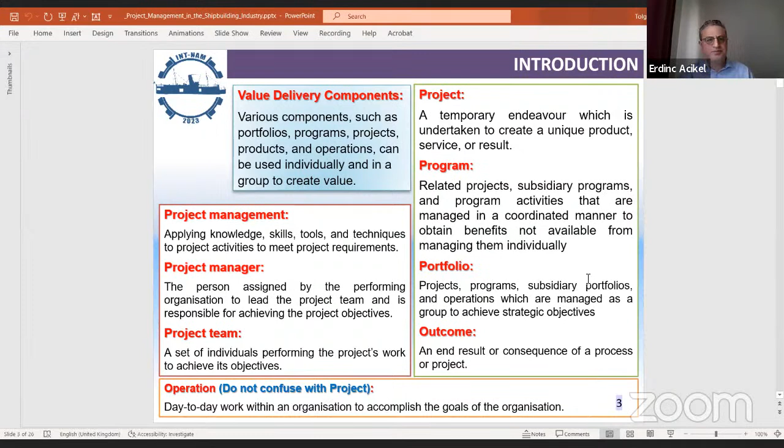So, project management in the shipbuilding industry. First of all, I would like to start with what a project is. A project, in common terms, is a temporary endeavor undertaken to create a unique product, service, or result. In our case, it is shipbuilding, so anything floating on water. When projects come together, they form programs. And when programs come together, they form a portfolio. As the end result, we receive value, which is the outcome. So we have a business benefit. Companies either conduct projects or day-to-day operations to reach their business value. You can take a screenshot; this is very general knowledge. You can look at it later.

As I said, a project is a temporary endeavor to create a unique product, service, condition, or result. We have a project environment, and our environment is either predictive, adaptive, or hybrid. Our project is predictive when we know what the end product is, like in our case, the vessels. Our project is adaptive when we are not sure where we are going. Mostly the software industry works adaptively. They use small increments, get feedback from the customer, and go on. Even though we think shipbuilding is predictive, actually it's quite hybrid, because we don't really use the common predictive project frameworks, and we tailor some components of the frameworks according to our needs. So mostly we are working in a hybrid world in shipbuilding.

Yeah, both from the product point of view and from the approach point of view. Indeed, the shipbuilding sector has more in common with hybrid construction, because as I mentioned in the very beginning, there are things which should be tailored according to the type of project you are building. It will be a completely different approach if you're talking about, for example, mega yacht building or a naval vessel, compared to building a chemical tanker or a general cargo vessel, where it is almost fully predictive what the end product will be.

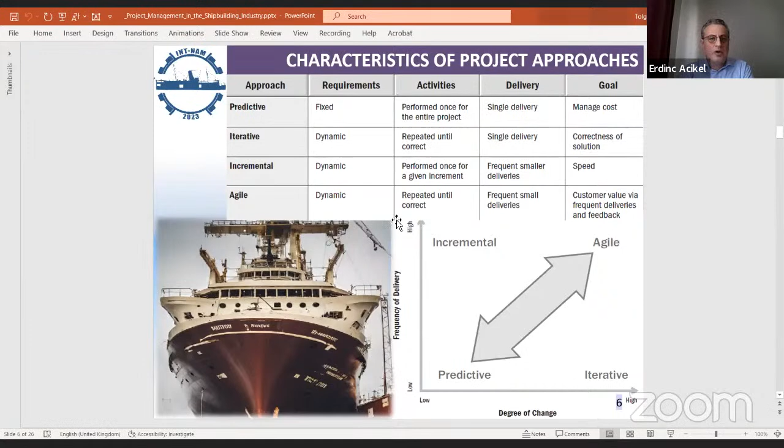And we have agile approaches, which are used when the environment is totally unknown. We just take small steps until we deliver what the customer requires. I am passing through here quickly because we have more important issues. In this case, we need to tailor our project approach for our shipbuilding project.

Tailoring is the deliberate adaptation of the project management approach, governance, and the processes to make them more suitable for the given environment and the work at hand. In the project environment, when we talk about tailoring, we talk about life

cycles and development approach. In shipbuilding, the construction of the new vessel may involve predictive approaches for the physical shipbuilding process. However, we may also, in parallel, use an iterative approach for understanding and determining the specific navigation and safety systems, for example. So our project approach is highly tailored, specific to every single project.

We tailor the development approach, like iterative or agile or predictive, determining which portions of elements should be added, removed, modified, blended, or aligned to our project. We tailor our engagements because in each project we have different stakeholders and they have different requirements.

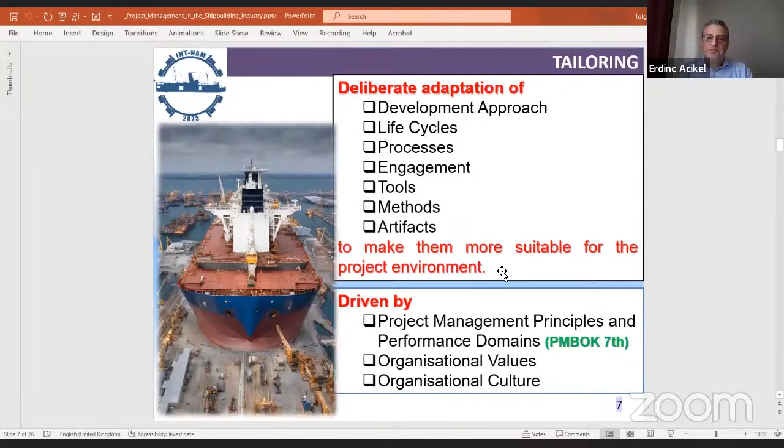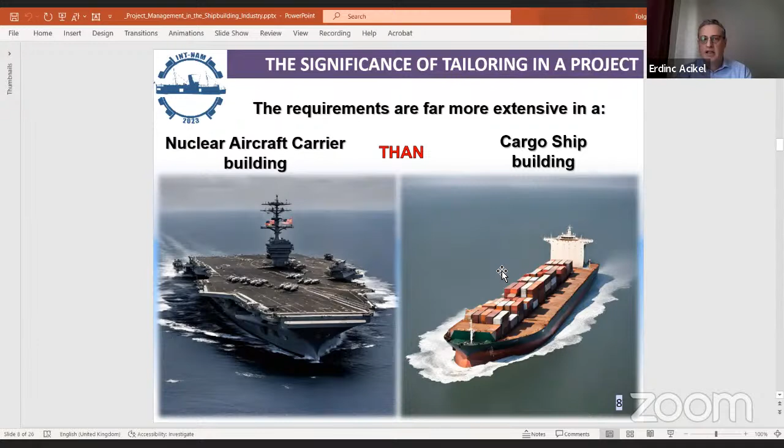Why we tailor? Because the requirements, as Erdinç said, are so much more extensive in nuclear aircraft carrier building than cargo ship building. So even though we are building a vessel, the projects are totally different, and we need very heavy tailoring specific to projects.

PMI suggests, like many other methodology makers, that there is a logical flow of the tailoring process. The tailoring starts with initial development approach selection. Project teams apply their knowledge of the product delivery cadence, I mean, how often we deliver our goods, and awareness of the available options to select the most proper development approach for the situation.

And later, we tailor for the organization. Organizations may establish different process governance, and the tailoring of the project must align with their organizational values. And after doing that, we tailor according to our project, what we consider in our project: of course, product and deliverables, the capacity of our project team, and of course, the cultural environment.

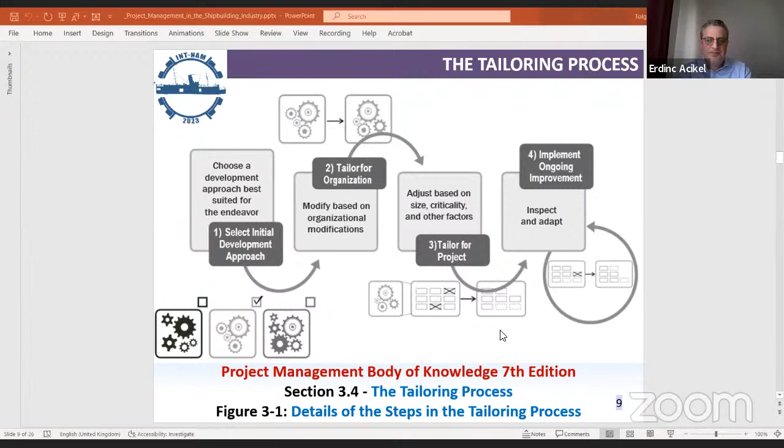I mean, it is not the same building the vessel in China and in Turkey. There are cultural impacts. And later, our tailoring actually is an ongoing process during the project, which we call progressive elaboration. Issues may arise during the project, and according to the issues, we may change our project's style a bit. We may start working more adaptively. So tailoring is non-stop, from the beginning until the end.

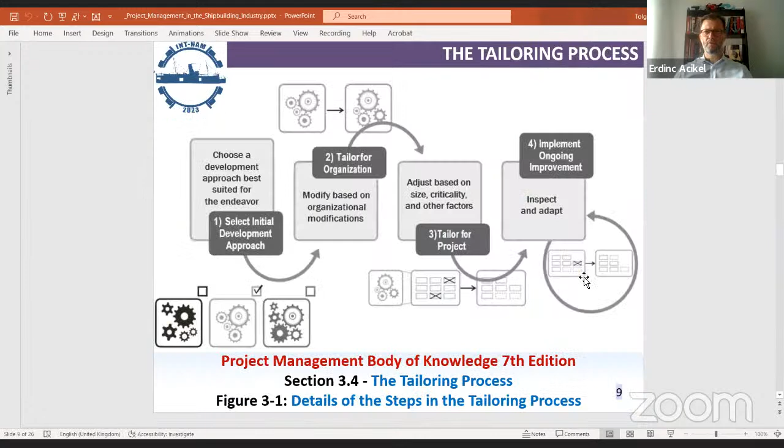For tailoring, we have some considerations given in... Sorry, yeah. Tolga, maybe we can better continue with the principles, considering the time.

Okay, we have some principles and project performance domains for consideration during tailoring. The principles. What are the principles? The principles are the fundamental bedrock of any profession, shaping strategies, guiding decision making, and aiding in problem solving. These principles often form the foundation of constructing professional standards and methodologies. And these project management principles have evolved through the collective efforts of project practitioners worldwide.

For me, the most common project principles used in the shipbuilding industry are: recognize, evaluate, and respond to system interactions; enable change to achieve the envisioned future state; effectively engage with stakeholders; optimize risk responses; tailor based on context; focus on value; navigate complexity. So what are they?

The system interaction is basically this: during our project, we have an internal project environment and an external project environment. Internal factors can arise from the organization, portfolio, or program, or another project, or the combination of all three. And they include process assets, data assets, infrastructure, resource availability, and employee capacity.

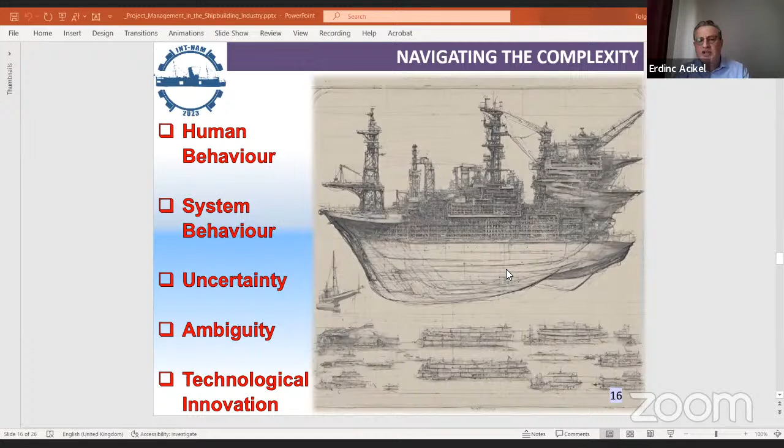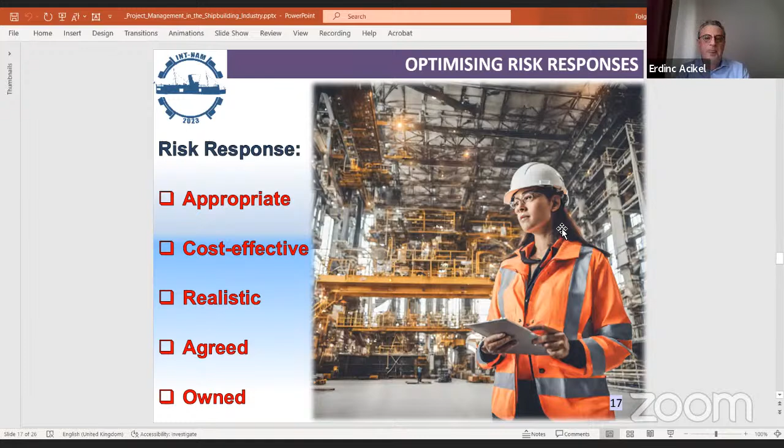We just need to be careful about complexity, allow project teams to adapt their approaches and plans to navigate potential disruption to effective project delivery. And of course, optimizing risk responses. I will talk about this in the risk management part, so I'll pass this part.

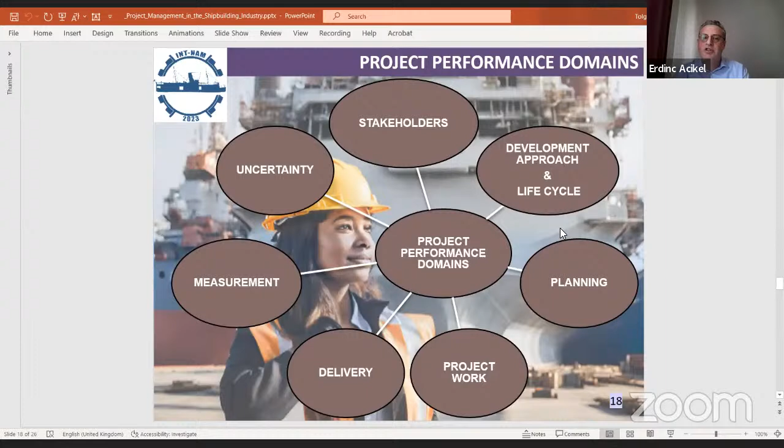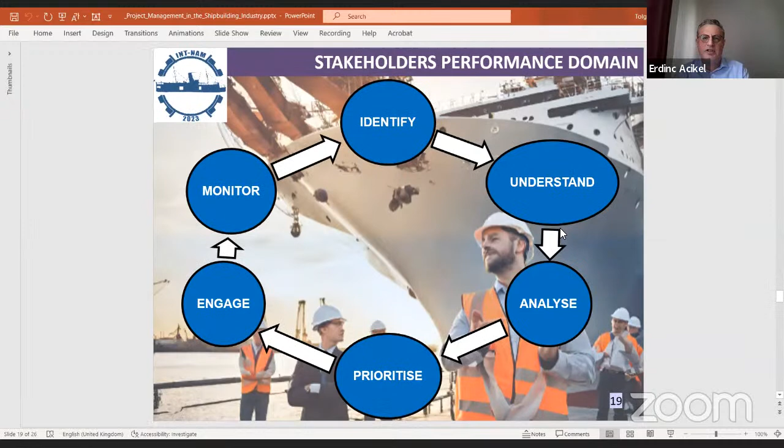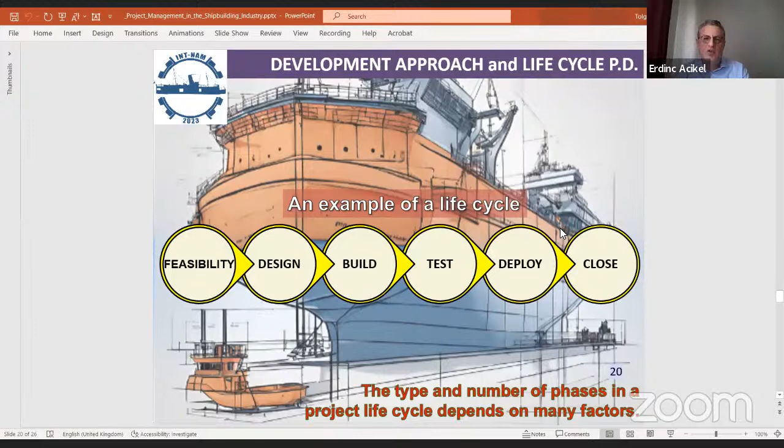We have some project performance domains. These are the common performance domains for all projects. We have development approach and life cycle domain, planning, project work, delivery, measurement, uncertainty, and stakeholder domain. I pass the stakeholder performance domain; this is about engaging with stakeholders. Development approach and life cycle I already mentioned a bit. This is about choosing the right development approach and life cycle specific to our project.

The planning performance domain is about the project management plan. And this is what we do at the beginning of every shipbuilding project. What we consider: what is the scope being delivered by the project, scope, schedule, budget, resources, physical and human resources, and what is our schedule. This is all the planning performance domain. The project work performance domain is about keeping the project team dedicated and activities running correctly. This is totally a human management performance domain.

And we have the delivery performance domain. This is about monitoring and about quality, actually, because our project delivery is about meeting requirements, scope, and quality expectations. It entails all these quality activities.

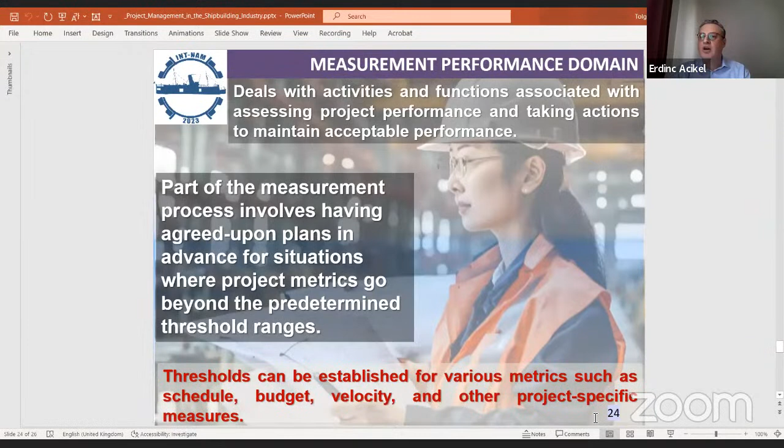Some of the measurements can be out of our thresholds. So at the beginning of the project, we also need to make some plans about what we will do if our measurements are out of the envisioned plans. This is what I'll talk about. We have lastly the uncertainty performance domain.

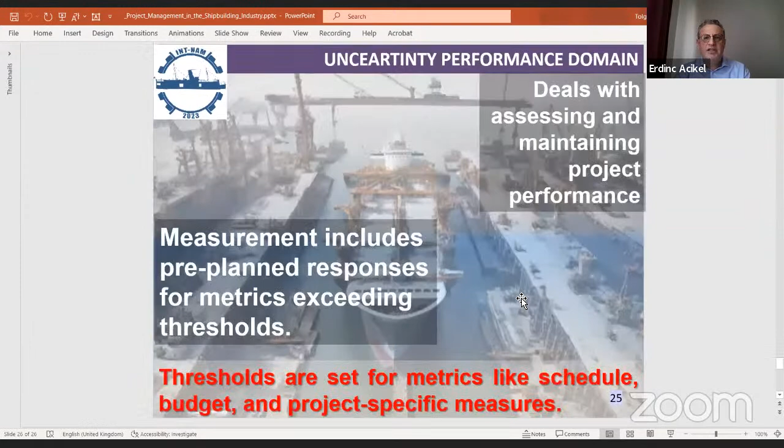Sorry that I interrupt, Tolga, but let's go to the last slide, please. Otherwise, we will not have sufficient time for the last presentation. Okay. This is uncertainty, which we will talk about.

Yeah, this is basically it. It's been very quick, but this is what project management in shipbuilding is about. Yeah, I think this slide especially summarizes it very well, Tolga. Thank you very much for your explanation for the first part. Maybe now we can go on with the second topic.

In the meanwhile, when you're opening the presentation, maybe I can say a few words about that. Of course, project management has many aspects, which are also quite important, and project managers should know the details of each specific part. Now, we will talk shortly about the risk management part of project management, which is actually only one aspect of project management. But let's start.

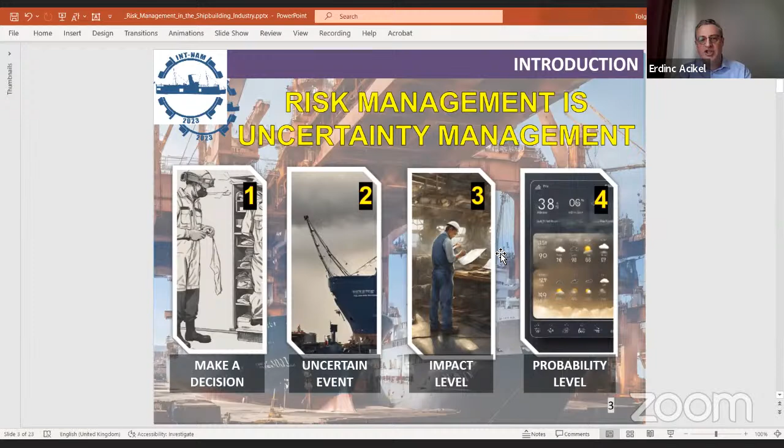Anyway, I'll just pass here because, in risk management, we are fighting with the unknown. If we don't have any information at all about what will happen and what will affect our project in the future, it means we are working in the unknown risk area. If we know everything from the beginning, it is not a risk anymore; it is a fact, a problem, an issue. So we need to solve that issue.

This is actually a really crucial point you mentioned, which is most of the time confused within projects. I've also experienced that in projects I have participated in. If something is already known, for example, if you already know that the main engine will be delayed in delivery, it's not a risk anymore. It's a fact. That's something you should count in your planning.

The main engine will be late, so you should put the relevant section drawings on hold or partly on hold. You should put the relevant foundation drawings and system drawings on hold. So all this is a fact. This is a very crucial thing which is mixed up most of the time. But there is a serious difference between a fact and a risk.

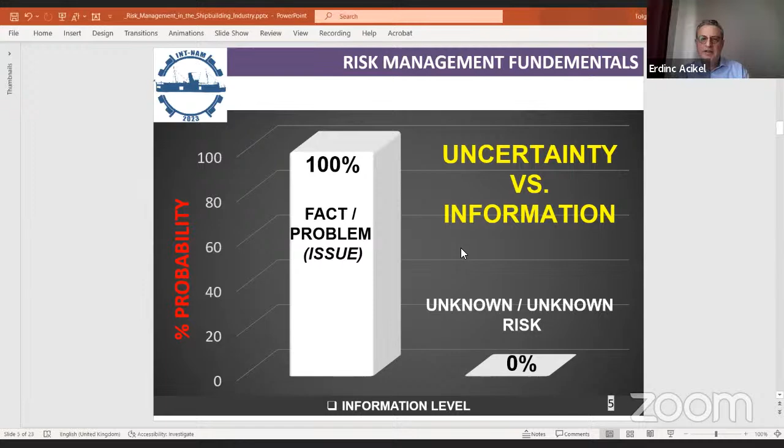Yeah. From 0 to 100, this is the world of risk. Basically, when we say risk management, we are fighting with shadows, to be honest. Things that have not happened yet, but might happen and affect our project positively or negatively.

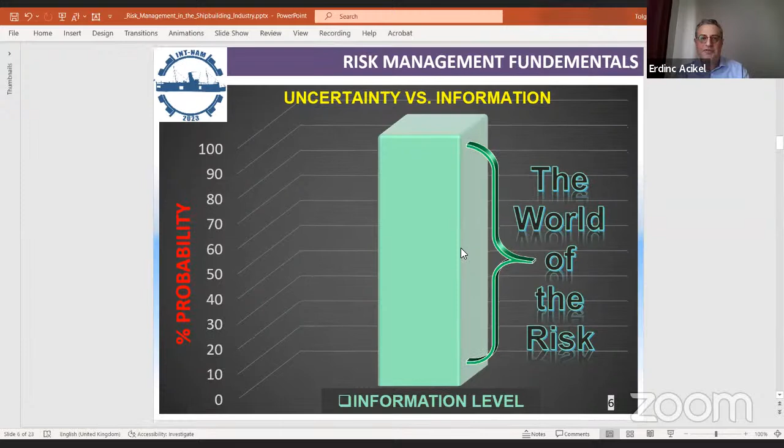Risk management actually asks these 6 questions. This is what risk management is. What am I trying to achieve? What might affect me? Which of these are the most important? What should we do about the most important ones? Did it work? And if it worked, what has changed? This is risk management.

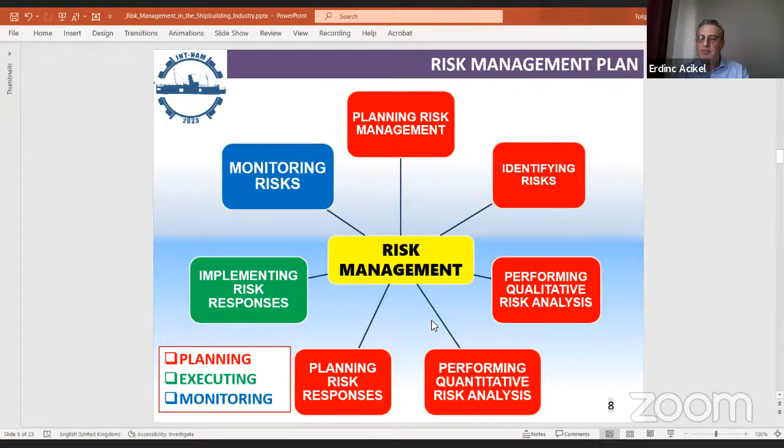In standard methodologies, PMI and also the others, risk management consists of 7 process domains. We plan, identify risks, and perform analysis. After that, we plan our risk responses, and during execution, if a risk emerges, we implement our risk responses. From the beginning until the closure of the project, we non-stop monitor our risks and update our risk lists.

In every process of risk management, like identifying risks or performing qualitative risk analysis, we have inputs, tools, and outputs to use. Inputs: what information should we analyze? How do we transform this information? And what information do we produce?

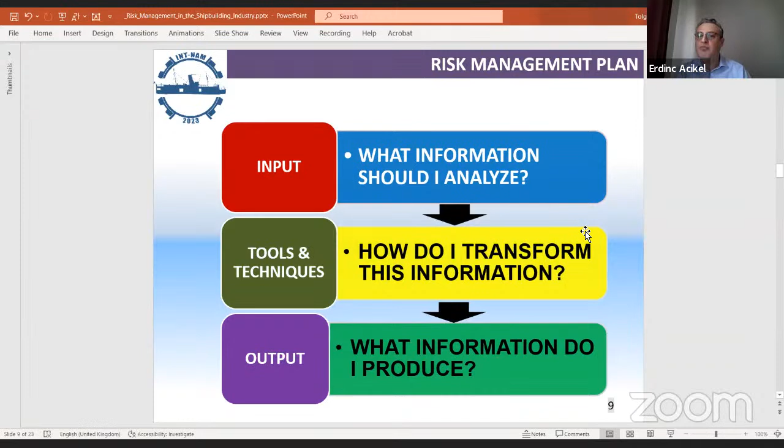We have some critical success factors. First of all, risk management is iterative. It starts at the beginning of the project and continuously develops until the end of the project. Once we have a risk management plan, we have rules about how to manage risk, procedures, and templates. We have roles: who is responsible for risk, and what to do.

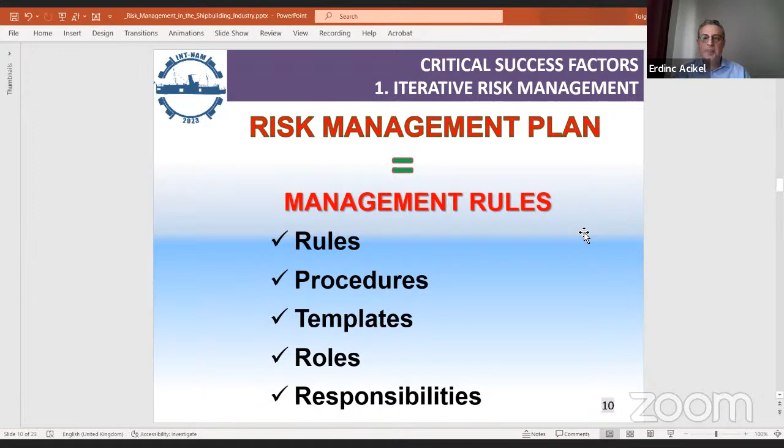So, Tolga, what you are saying is that it is actually a living document from the very beginning till the end of the project. And of course, over time, some risks may become facts and not risks anymore.

So they should be recognized and implemented in the budget, in the planning, as a fact, but not a risk anymore. But there may be also new risks that should be counted. For example, in the middle of the project, you foresee a risk for the delivery period or a commissioning period. So they need to be also implemented. So it's a live document, actually, which needs to be updated from time to time, frequently during the project.

Yes. The large number of risks in any project are related to stakeholder management and assumptions. Actually, please take a screenshot because this is very important. We have risk because of people and the assumptions we make at the beginning of our projects.

Of course, when we make our risk plans and list, we check the country context, the microeconomic information, political information, social conflicts, also execution roles and responsibilities, organizational processes, also about our project, stakeholders, assumptions, agreements. These are all sources of our risks.

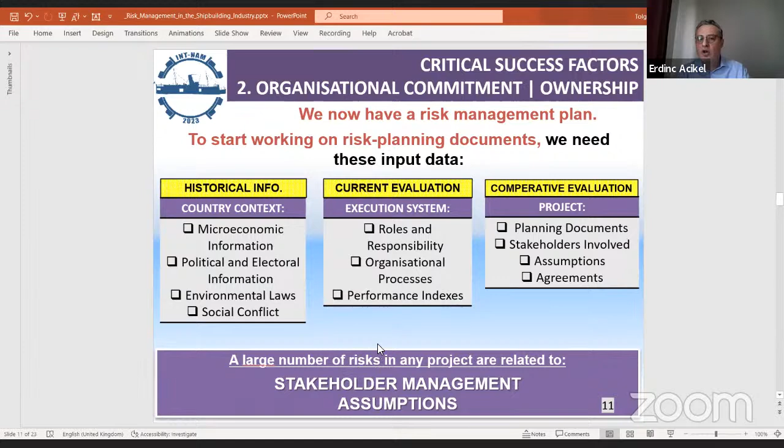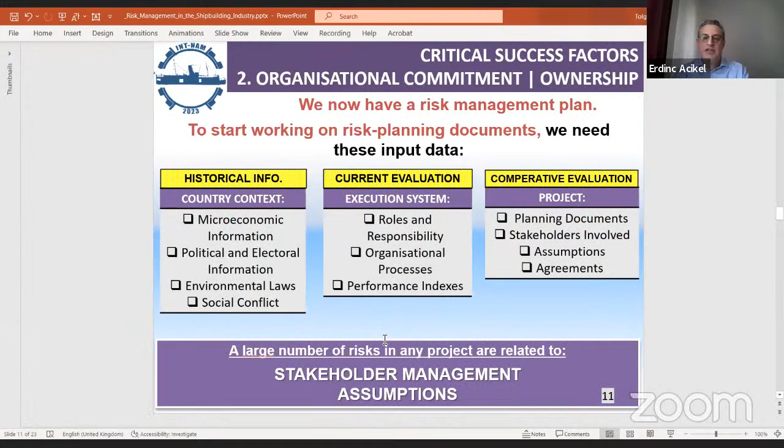Once we have risk identification, considering all these facts, now we need a high quality risk register document. But what is a high quality risk document? A high quality risk document means the information and data inside the document is correct. It is not just imaginary and sci-fi. It is based on the facts. How?

We have a risk statement. Our risk statement should be SMART. SMART means we need specific information. Our information needs to be measurable, attributable, realistic, and time-bound. I give you an example.

For example, we ask the question: if the tariff for importing technological products for our vessel is approved within the next 2 years, the cost of the plant's equipment will be affected and generate cost overruns of 15% in the project budget.

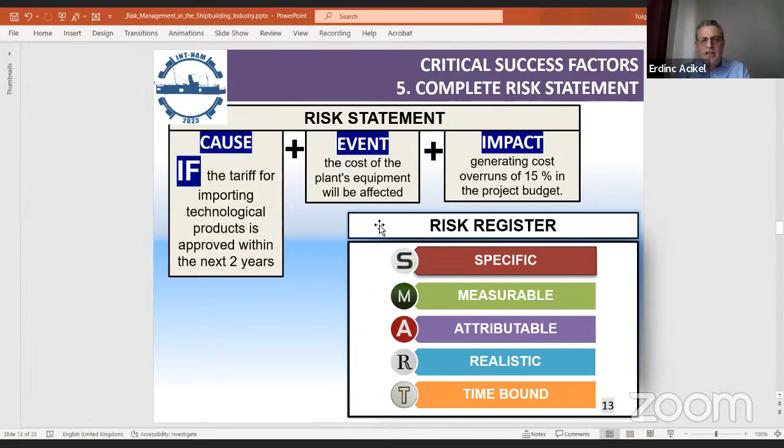So, yeah. I think we can skip the other 2 examples then, due to the time limitation. Okay, and continue with the next slide. Okay. You have only 1 minute according to the schedule we decided. Okay. Thank you. Just give this example and finalize then.

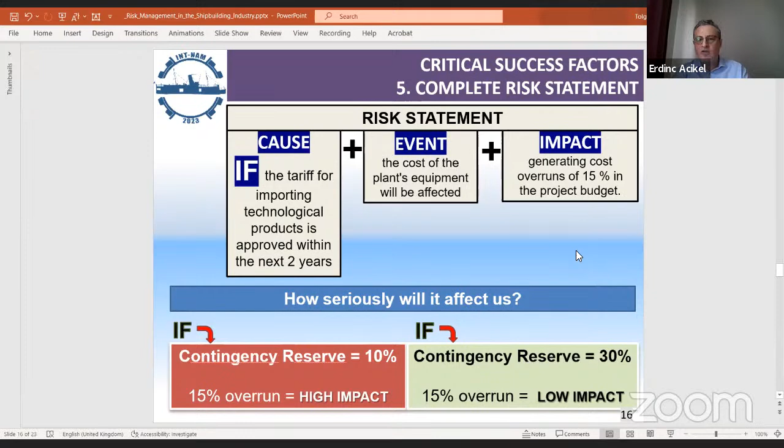Let's say we have contingency reserves at the beginning of the project. If the impact is 15% and our contingency reserve is 10%, this risk has high impact. But if we have 30% contingency reserve, this risk has low impact. How do we visualize this? This is the most important part for the students. We have the probability and impact matrix. Please take a screenshot. This is the most common thing you will ever see in your risk management life.

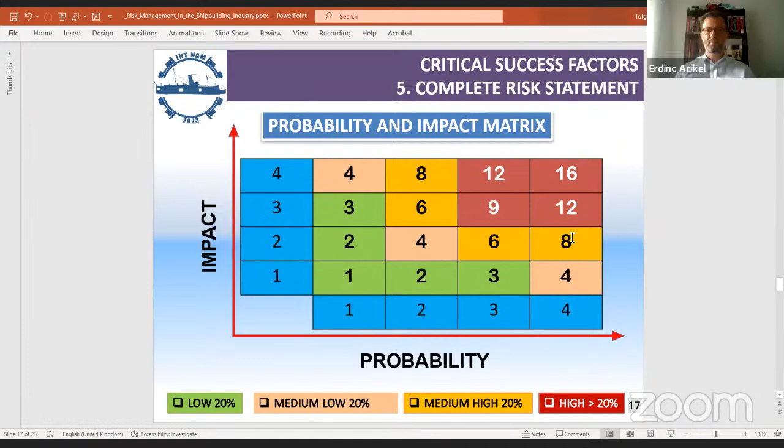So Erdinç, I believe we covered the most important parts of risk management. The rest are so detailed, and we have no time, I believe. Maybe you can go to the last slide, as it can stay on the screen, Tolga. Last slide. Yeah, please. Which one? Last slide, just for the email addresses. Yeah. Then, thank you for your connection. In 1 minute, our colleagues complete their presentation.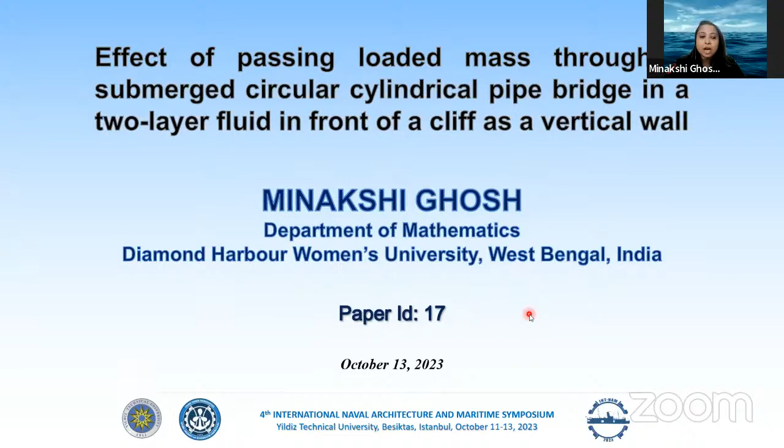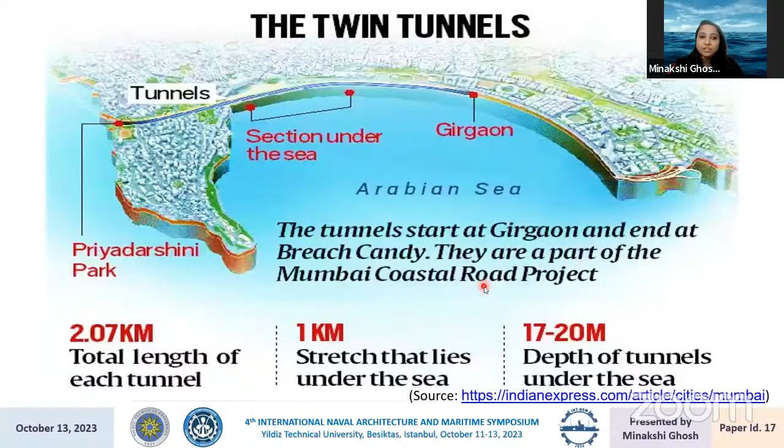Before I talk about our work, let me present before you a report from India's Times Now of May this year, mentioning India's first undersea twin tunnels in the Arabian Sea that is set to open next month. Also, the Turkish newspaper Daily Sabah mentions the Great Istanbul Tunnel construction under the Bosphorus at a depth of 110 meters under the bed. It's the world's first three-level tunnel, the third to connect Europe and Asia, scheduled to open in 2028. Also, the Fehmarn Belt Tunnel is the world's longest immersed tunnel, about 18 kilometers long. It will be ready to open by 2029.

Such immersed tunnels started from the successful construction of the Thames Tunnel in the 19th century. Such tunnels and pipe bridges are either immersed on the bed of the water bodies or submerged or placed at a depth below the bed. These are constructed to improve the connections of roads, railways, electricity, and water supplies across the water bodies. There have been plenty of proposed plans and research work on wave interaction with submerged cylinders for the successful construction of submerged floating tube bridges. Among the various methods based on linear wave theory, the method of multipole expansion was introduced by Dean and Ursell, and it has rapid convergence.

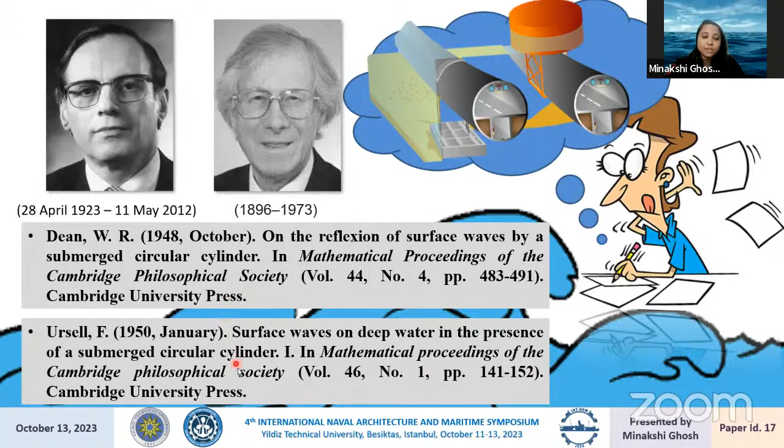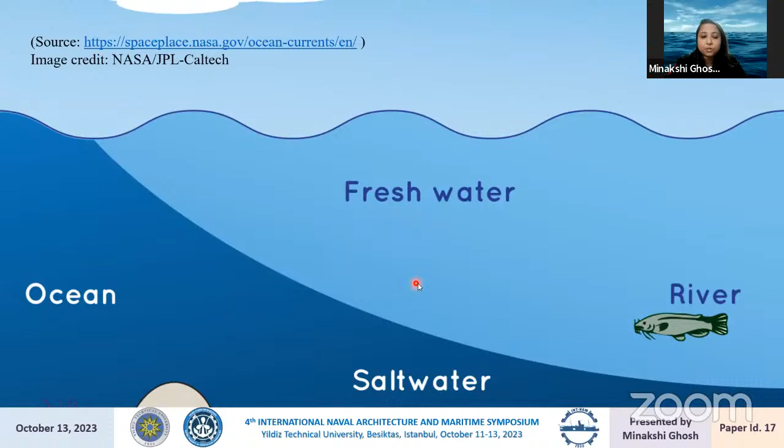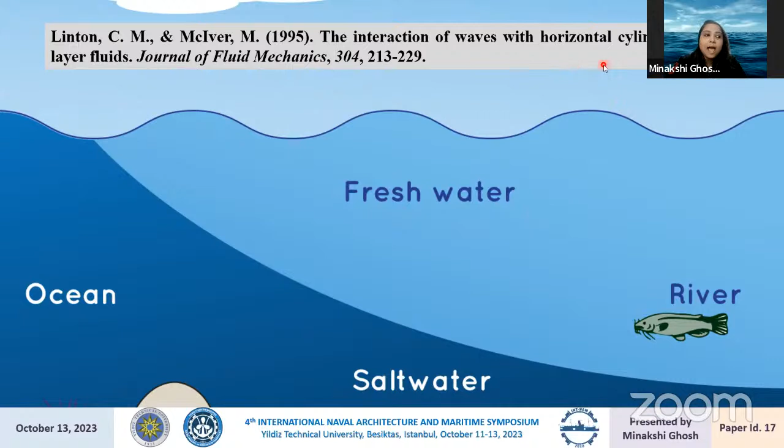Also, we know that fluids are generally density stratified. It may be due to differences in salinity, temperature, concentration of various solutes, or a combination of these factors. Thus, fresh river water might float over saline oceanic water, or warm salt water, being less dense, might float over colder fresh water. Wave propagation in such a density stratified fluid was first studied by Stokes, and Lamb discussed the linear motions which occur in this fluid. In 1995, Linton and McIver discussed wave interaction in a density stratified two-layer fluid with a horizontal cylinder as an obstacle, and Feng et al. in 2008 studied the interaction of linear waves in the same two-layer model, but with an array of similar obstacles.

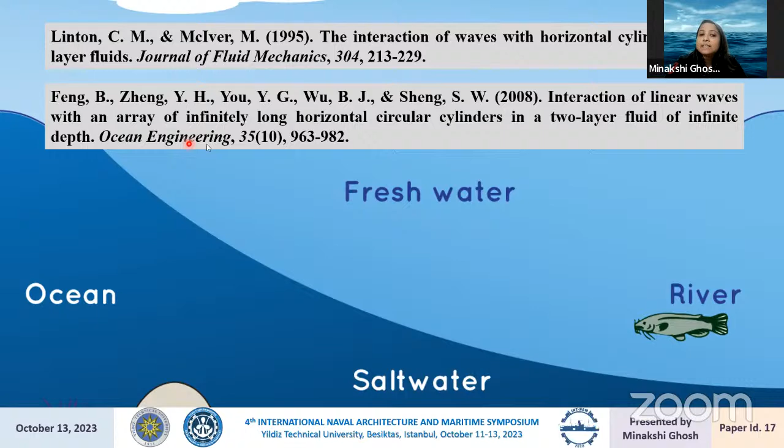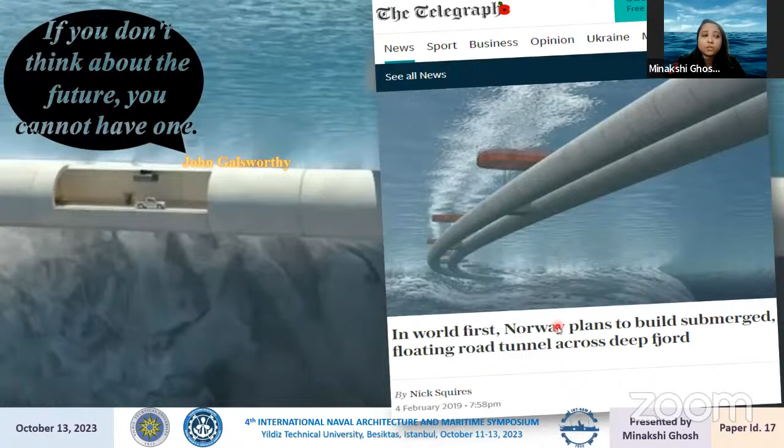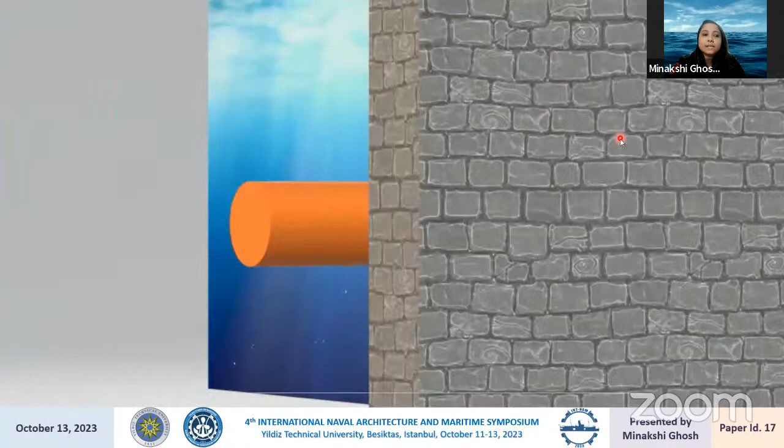Such cliffs, which are vertical or nearly vertical, are modeled as a vertical wall in wave interaction problems. These vertical walls are also used as breakwaters for protection of seashores from waves or for berthing and transport facilities. Recently, there has been increasing interest in studying wave interaction with submerged structures placed in front of a vertical wall in a bounded fluid domain. But the fluid was considered of uniform density. Since density stratification is a common feature of geophysical flows, we must study these investigations in a density stratified fluid model.

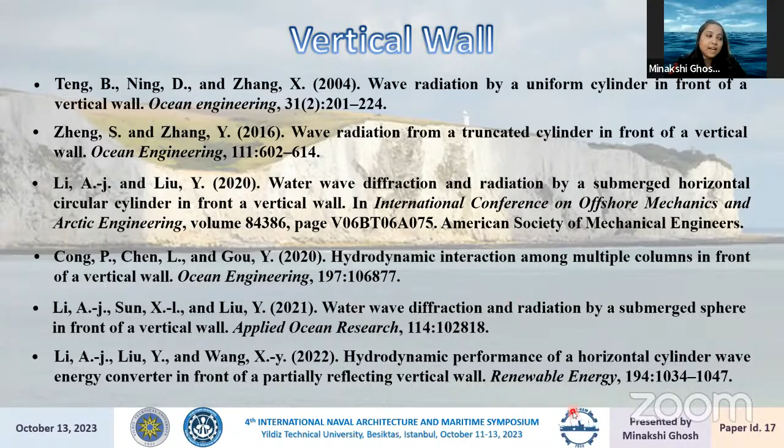This motivated us to extend Li and Liu 2020, that discussed the wave diffraction and radiation problems by a submerged horizontal circular cylinder in front of a vertical wall in a bounded fluid domain, but in a uniform density fluid, to investigate our present problem, that is the effect of the cylinder's motion due to passing loaded mass through it when it is placed below the interface in a density stratified two-layer fluid in front of a cliff, which is presented as a vertical wall in our problem.

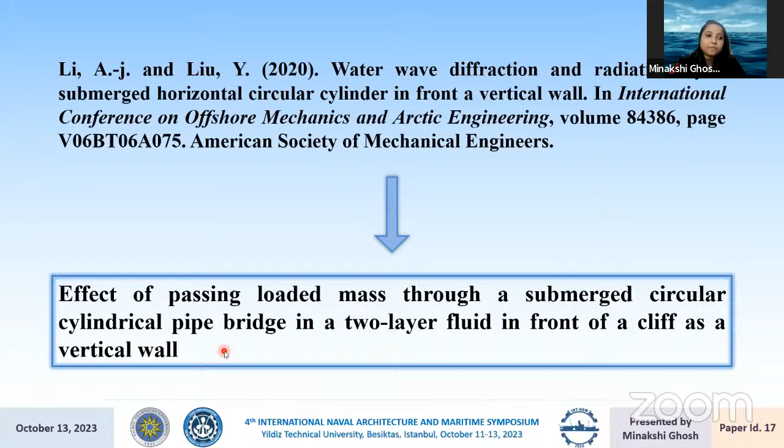We assume that the submerged cylinder is of infinite length, thus its circular cross-section gives us the following model. In linear water wave theory, a small motion amplitude wave propagates in these two superposed incompressible and inviscid fluids of densities ρ1 and ρ2, where the lower layer is denser since ρ2 is greater, and any effect due to surface tension at the interface between the two fluids is neglected.

Also, we see that the upper fluid is of uniform finite depth h, while the lower fluid is of infinite depth, and this infinitely long horizontal circular cylinder is fully submerged below the interface in front of this infinite length vertical wall. Here, the vertical wall reflects waves. This is the idealized sketch of the wave-cylinder-wall interaction problem.

To study this, we apply a right-handed Cartesian coordinate system with the origin on the interface, an x-axis located horizontally on the interface pointing to the right, and a z-axis vertically upwards along the vertical wall, with z equals 0 as the mean position of the interface and z equals h as the mean position of the free surface. The circular cross-section of the cylinder is of radius a, and the center of the cylinder is at a submerged depth f below the interface and at a distance b from the vertical wall.

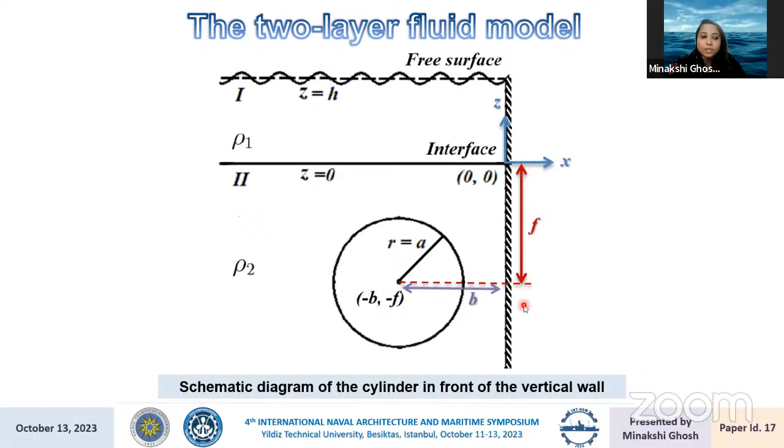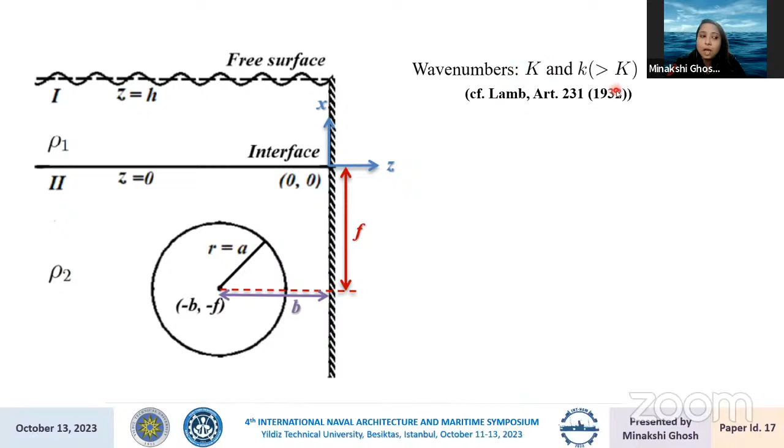In a two-layer fluid, a time harmonic wave with a particular frequency in linear motion propagates with two distinct wave numbers, capital K and small k. Here capital K is the smaller one. These two are exactly the two real positive roots of the dispersion equation, which is given as follows, and they are related by the following relation. Here sigma has this form, where rho is the density ratio of the upper and lower layer, and thus it is less than 1.

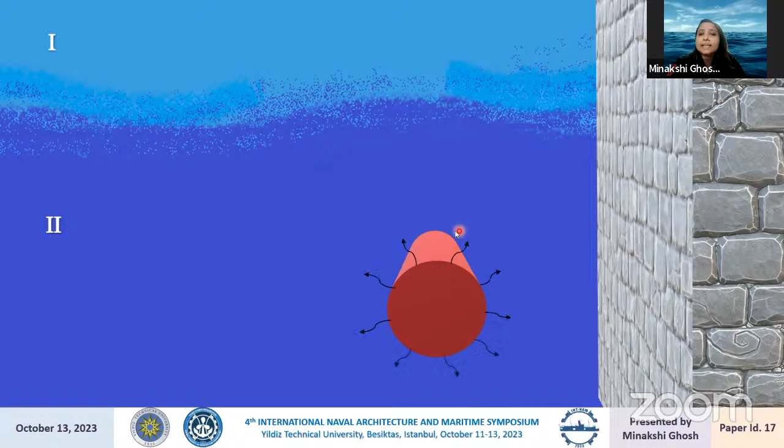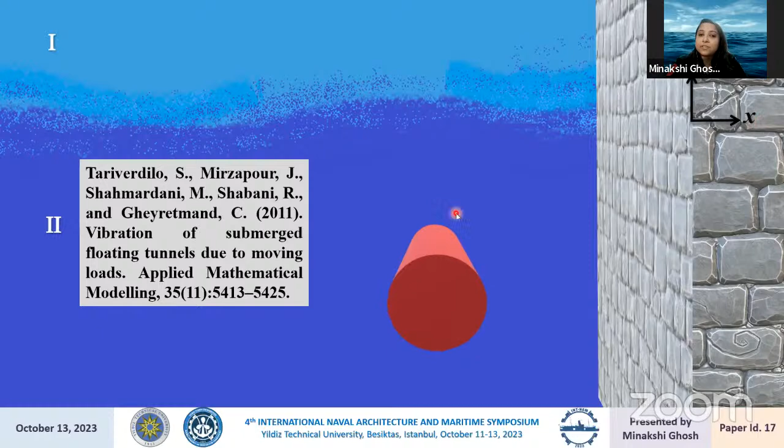On passing loaded mass through this submerged cylinder below the interface, it experiences vibrations and radiates waves in all directions of the fluid when the fluid is otherwise still. Literature says that such vibrations of submerged floating tunnels are studied by the translatory oscillatory motion along the x-axis, known as swaying motion, and translatory oscillatory motion along the z-axis, known as heaving motion.

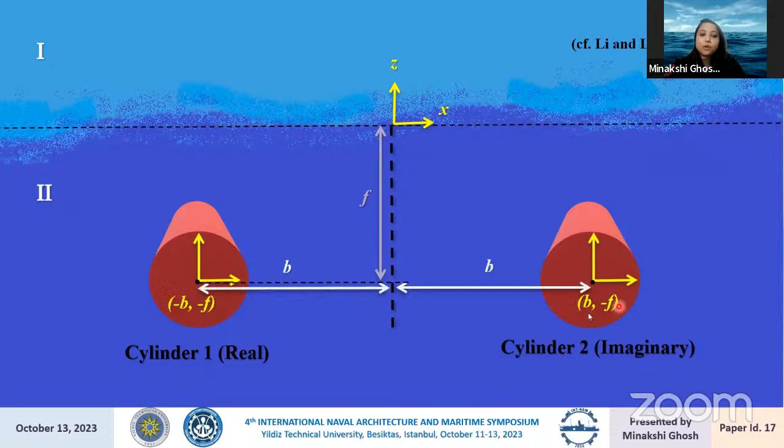We solve this problem based on the image principle. Thus, this problem is transformed into an equivalent problem containing two submerged circular cylinders placed horizontally below the interface in a horizontally unbounded fluid domain, as there is no vertical wall this time. The cylinders are named cylinder 1 and 2, where cylinder 2 is the image of cylinder 1 concerning the position of the vertical wall. But the vertical wall is not here; this is a horizontally unbounded fluid domain. Thus, the distance between their centers is twice b, and these are the centers of the cylinders, giving us this model to work on.

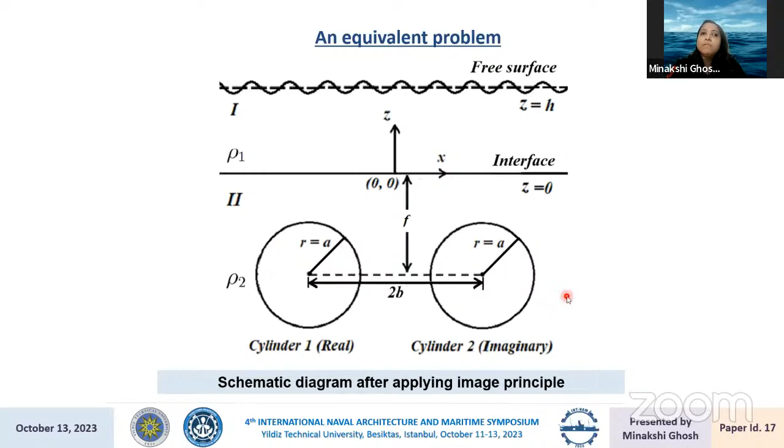Our problem is to compute the non-dimensionalized added mass and radiation damping caused by the radiated waves from the swaying and heaving motions of the cylinders. This represents our wave radiation problem. The local polar coordinate system for cylinder L in this xz-plane is given as follows. We assume the motion starts from rest so that it is irrotational, and it is sinusoidal in time with a particular frequency omega.

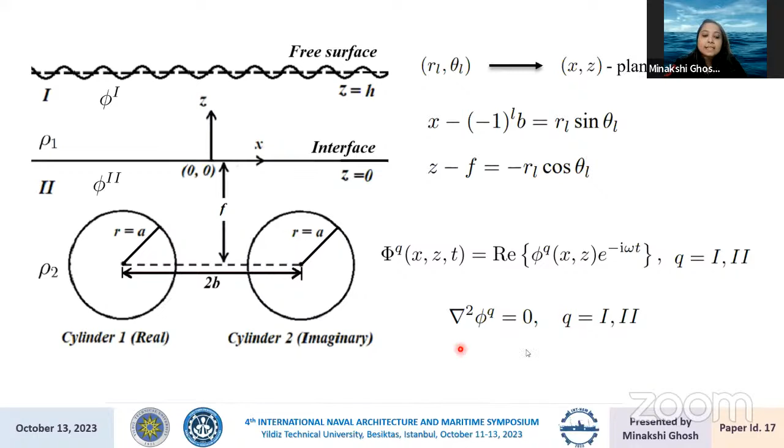So the fluid velocities are given by the following time-independent complex valued potential functions, phi1 and phi2, in the upper and lower layer fluids respectively, which, using the equation of continuity, satisfy the following two-dimensional Laplace equation throughout the fluid region. This is the governing equation of our water wave problem.

Now, computing this mathematically, we have certain boundary conditions, where these two are the linearized boundary conditions at the interface of the two fluids, obtained from continuity of normal velocity and continuity of pressure at the interface respectively. Here rho is the density ratio, k is the wave number, g being gravitational acceleration. Then using the dynamical boundary condition at the free surface, obtained from Euler's equation of motion under linearization, and the linearized kinematic condition at the free surface, we have the following linearized boundary condition at the free surface.

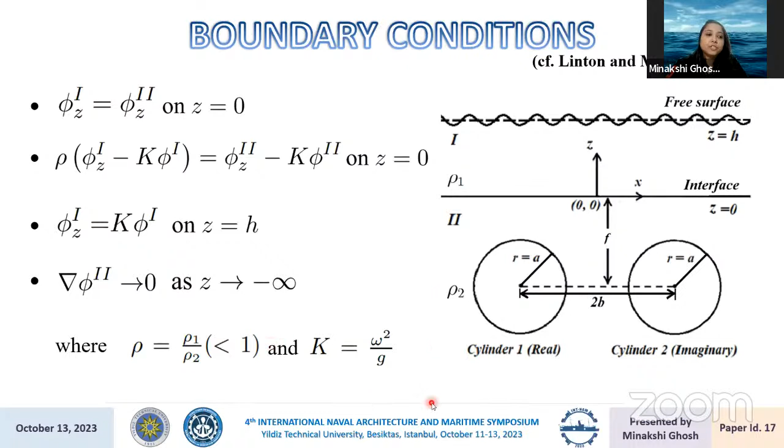And then we have this no motion condition at the bottom at infinite depth. This represents our boundary value problem, which we will solve using the multipole expansions method. When the cylinders are submerged in the lower layer, following are the symmetric and antisymmetric multipoles, and they satisfy the boundary value problem. Here, this is singular at the center of cylinder L.

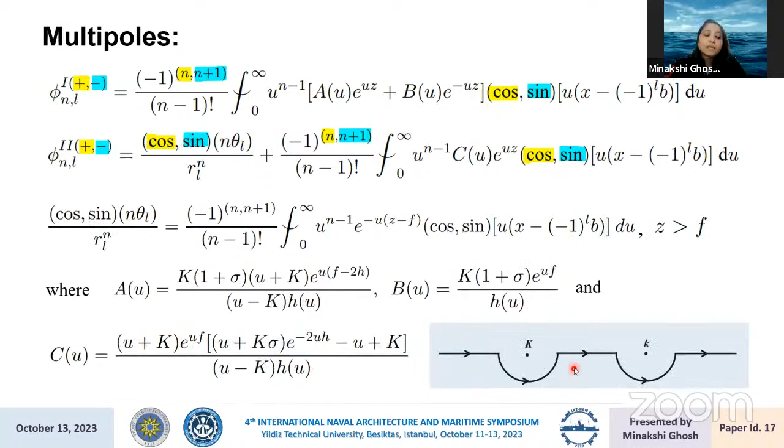Thus, we have the following integral representation for this, and since we have the cylinder below all the other boundaries of the problem, following is the integral representation as z is greater than f. Now, using the boundary conditions on these multipoles, we have A, B, and C, and all the integrations over here are intended to pass beneath the singularities capital K and small k.

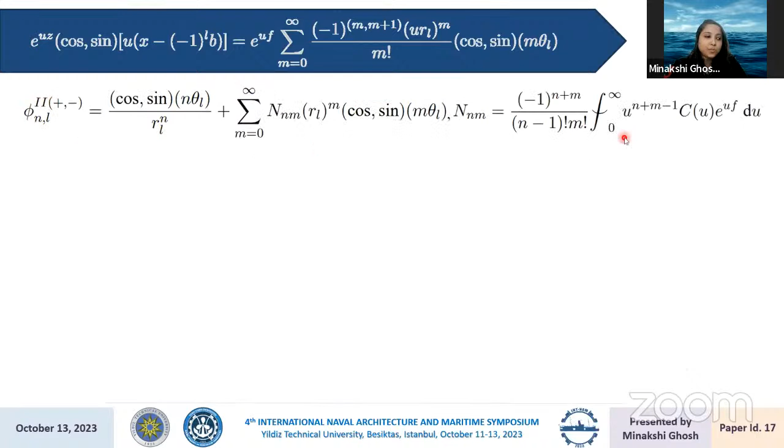Now, using the Taylor's expansion on the multipoles in the lower layer, we have the following form where n is expressed as follows. Again, we have this expansion where r_jl, theta_jl is the coordinate of the center of cylinder L in terms of the polar coordinate system R_J, theta_J. Thus, for the cylinders 1 and 2, we have the following values, which we'll use.

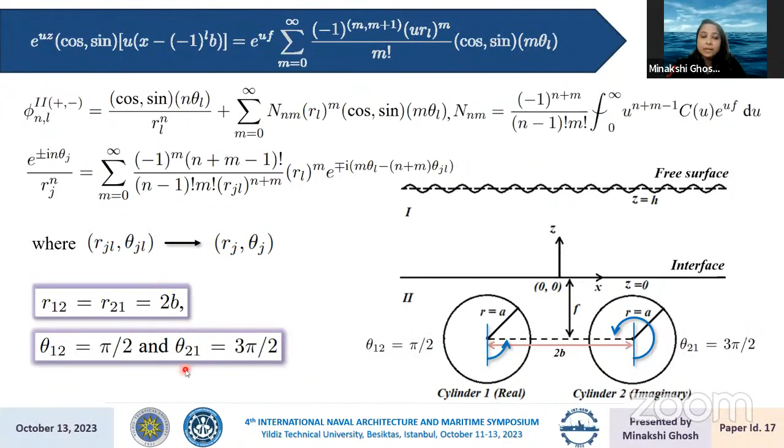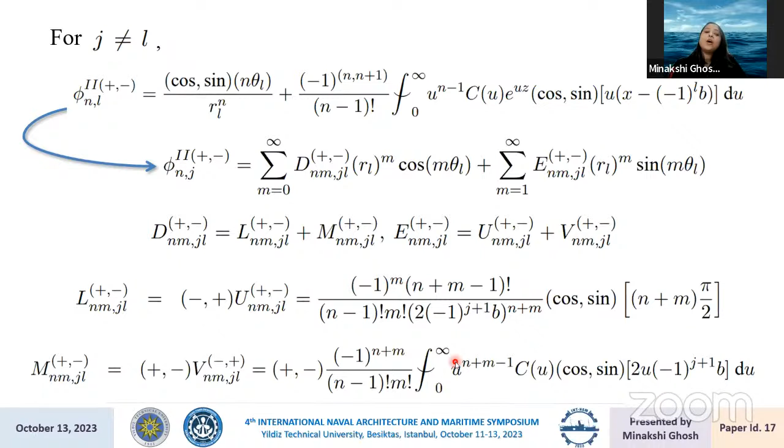Again, using Taylor's expansion for the cylinders when J not equals to L, the multipoles in the lower layer are expressed in the following form, where D and E have these expressions. Now, when we consider the imaginary problem and the cylinders are swaying with unit amplitude in opposite directions in this horizontally unbounded fluid domain, following are the structural boundary conditions of these cylinders.

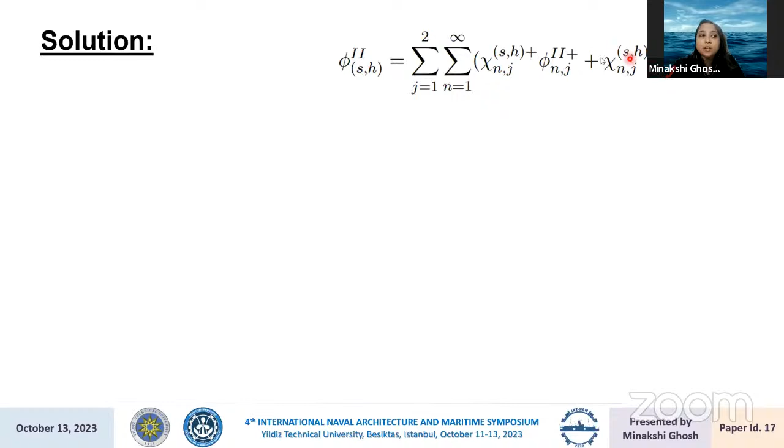And we have these structural boundary conditions when the cylinders are in a heaving motion with unit amplitude in the same direction in this horizontally unbounded fluid domain. For the solution, we have the following potential functions of the swaying and heaving cylinders when the cylinder is in the lower layer, which is expressed as a linear superposition of all the multipoles in the lower layer in terms of the unknown complex coefficients, which we will determine using the following body boundary condition, which we have previously mentioned.

Here, the potential functions of swaying and heaving cylinders are substituted, and then by multiplying both sides with the following trigonometric functions and then integrating as follows, we applied the orthogonality of trigonometric functions and obtained the following two pairs of infinite systems of linear algebraic equations with the unknown coefficients. Following are for the two problems with swaying and heaving cylinders respectively.

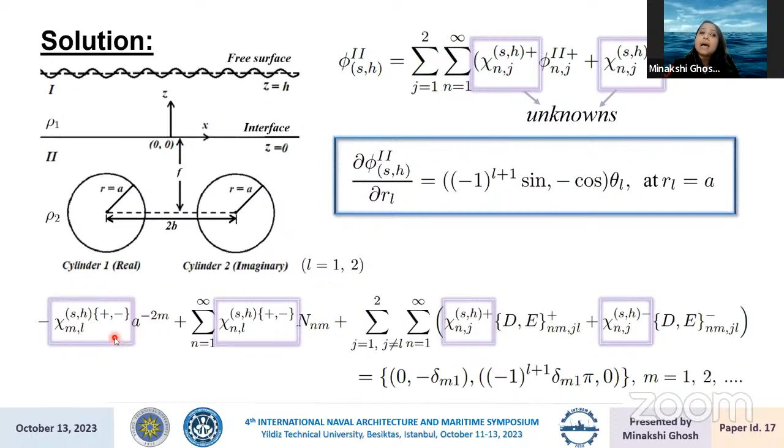Now, these unknown complex coefficients are determined numerically by solving each pair of these equations simultaneously by truncation method. After obtaining these unknowns, we compute the hydrodynamic forces by integrating the dynamic pressure over the body surface.

Sorry, you have 5 minutes. Excuse me, you have only... okay. 5 minutes, please. Okay, thank you. 5 minutes, thank you. Thank you.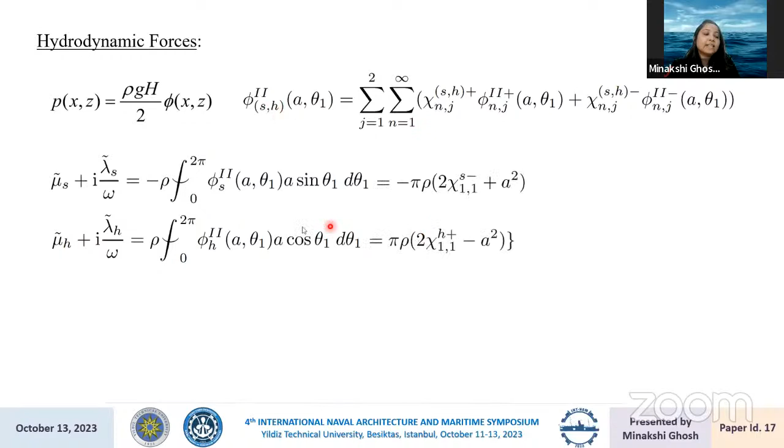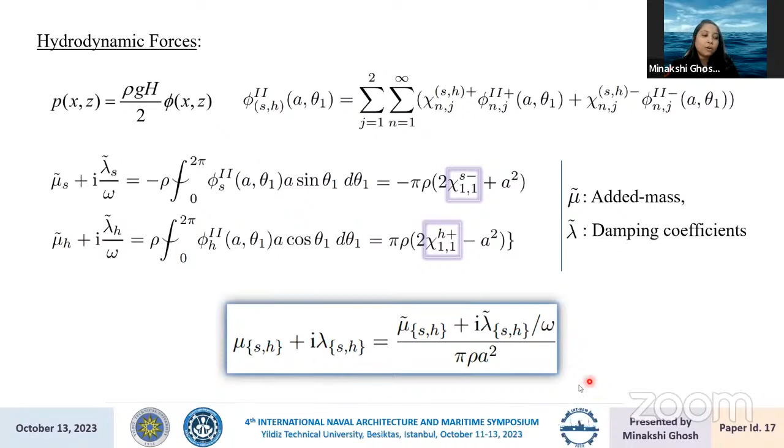Where these are substituted from the swaying and heaving potential functions and are calculated by the obtained values of the unknowns. And the real and imaginary parts give us the added mass and damping coefficients. Their non-dimensionalized forms are obtained from this expression. Now, since we solve this by truncation method, we have to verify the convergence, and we know that multipole expansion has rapid convergence.

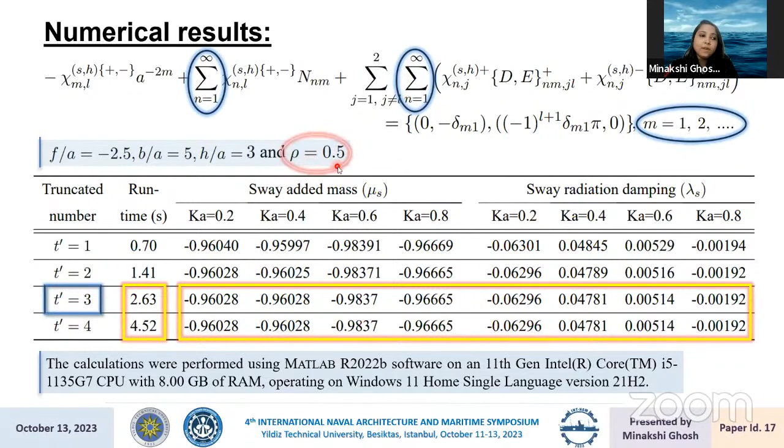Thus, we easily get the truncation number at 3. For all the numerical examples, we have the density ratio as 0.5 and the uniform depth of the upper layer as 3. Now, to study the effect of different spacing between the cylinder and the wall on the non-dimensionalized added mass and damping coefficient, we considered this as the submergence depth of the cylinder, and we plot the graphs for non-dimensionalized added mass and damping coefficient against the wave numbers for both swaying and heaving cylinders.

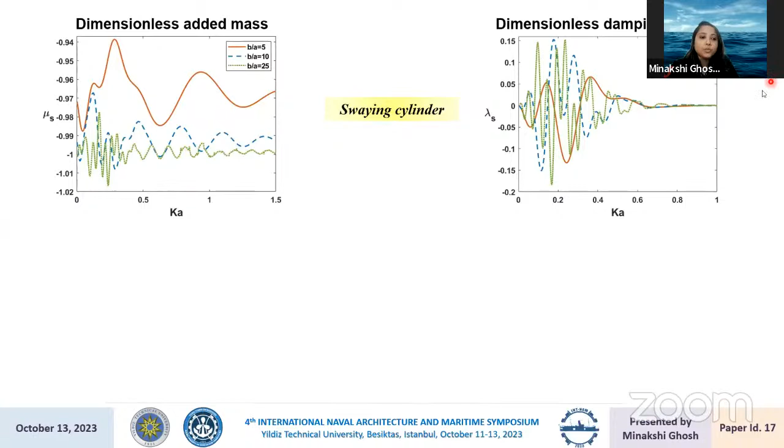We notice here that they have an oscillating behavior, which is unlike for a horizontally unbounded fluid domain, and the frequency of oscillation increases as the space between the cylinder and the vertical wall increases. Also, at a large spacing, we see that a rapid alteration is observed. Now, at a smaller spacing, we see that the dimensionless added mass has a smaller negative value than the others.

Whereas for heaving ones, they have more negative than the swaying ones. Now, for the damping coefficient, when the distance is more, we see that the extremes of the curves are more prominent than others, and the radiation damping oscillates about 0 and finally vanishes after a certain wave number.

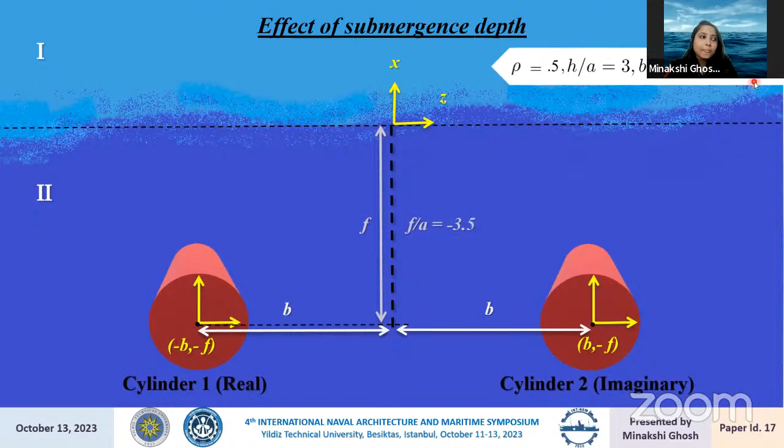Now we study the effect of different submergence depths of the cylinder by taking the distance between the cylinder and the vertical wall as 10, and we plot the graphs similarly for the swaying and heaving cylinders. Here, this represents the larger submergence depth, and we notice that the extremes of these curves decrease as the submergence depth increases.

Also, we see interestingly that the added mass returns periodically to its initial value, and damping coefficients return periodically to 0 for every distinct submergence depth at the same wave numbers. And also, they reach their local maxima and minima for every distinct submergence depth for a particular figure at the same wave numbers.

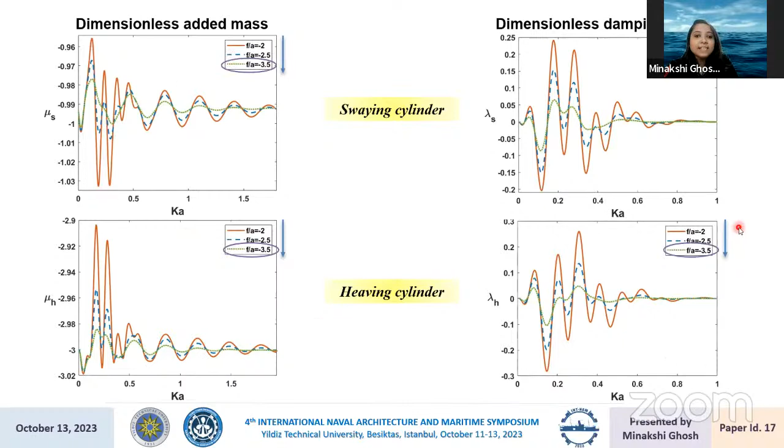With all these findings, we conclude our work mentioning a report from PR Newswire of 2019 that mentions such submerged floating tunnel construction, which is in conceptual stage in the Arabian Sea by the National Advisor Bureau Limited, that will connect United Arab Emirates and India, China, and Pakistan. But another study of the Indian coastline shows that the west coast of India contains cliffs in the Arabian Sea.

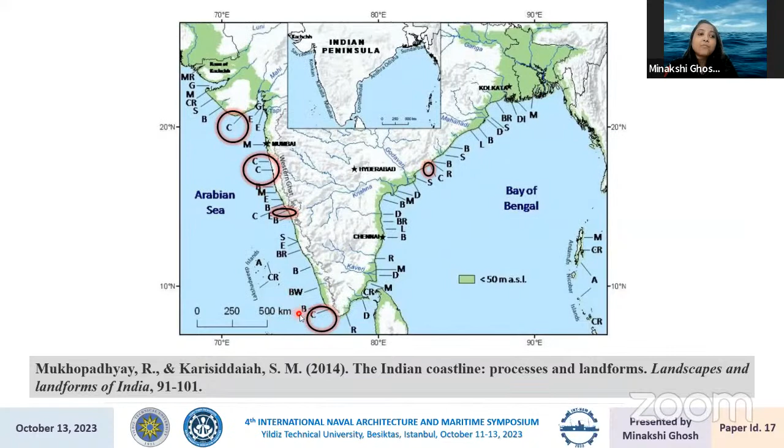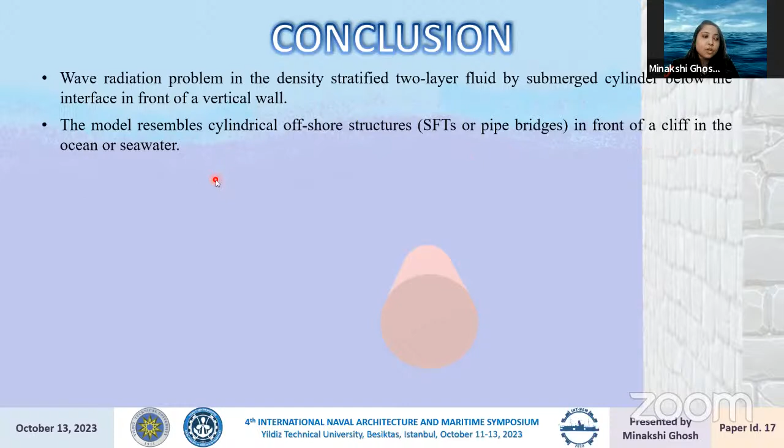Thus, our present study of the wave radiation problem, studying the submerged floating pipe bridge in a cliff-bounded and density stratified fluid model, has a vivid place in research, where we have obtained the dimensionless added mass and radiation damping for the radiated waves due to swaying and heaving motions, both analytically and numerically, using the image principle and multipole expansion method.

And we have noticed that when we plot the graphs, they have an oscillating behavior, which is different from the horizontally unbounded fluid domain. And this frequency of oscillation increases as the distance between the cylinder and the vertical wall increases. Also, when we plot the graphs for the different submergence depths of the cylinder, the peaks of the curves are more when the cylinder is closer to the interface.

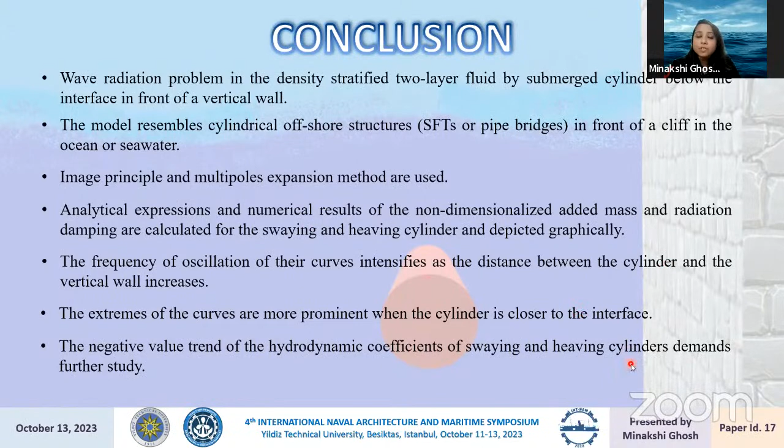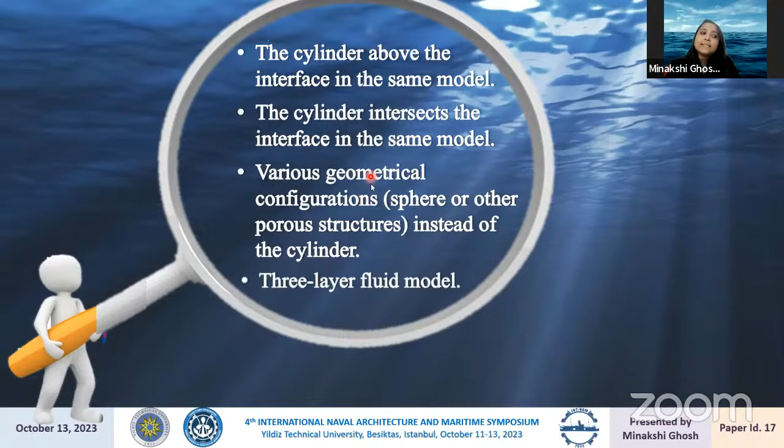However, the negative value trend of these hydrodynamic coefficients for the radiated waves requires further studies. This present study can be extended to study the same model when the cylinder is above the interface or when it intersects the interface. This is a very interesting one. Or this cylinder may be substituted by various other geometrical configurations, considering a density stratified fluid of 2 layers with a vertical wall. Or this density stratification may be extended to study a 3-layer fluid model. We recently have some papers with 3-layer density stratified fluid models.